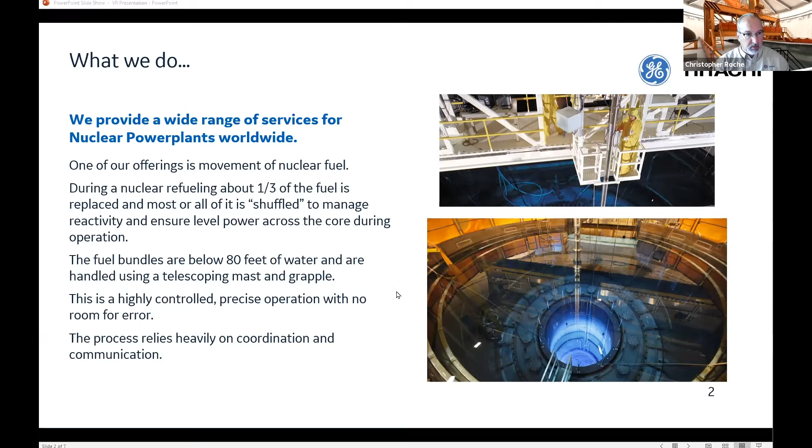So this is kind of what we're talking about as a company. When we do training, what we've done in the past is we build physical mock-ups, and we train our people on those physical mock-ups. So it's hands-on. In San Jose, California, we have a full-size boiling water reactor mock-up, and we can take students out there and we can train them to move fuel. We can put them on a mast and they can move their dummy bundles, but they're still fuel bundles, and we can go do that.

The problem with that is we have to fly everybody out there. We have one mock-up, and sometimes it's not used for moving fuel. Sometimes it's used for moving something else. So it's got limited availability. And you also have a limited, once again, I talked about we had customer people there. To get everybody together to coordinate that is very, very difficult. Those senior reactor operators are in high demand, and the sites do not like to let them go, especially for a week or something like that. They're very, very skilled people.

So we were looking at, hey, how can we improve our fuel moving capability, our fuel moving coordination? And this is for not just training new people, but also making sure that our experienced people are maintaining their proficiency. We started looking at what kind of simulators can we build, what kind of simulators can we put together. And we were coming back with a lot of, that's really not going to work for us. We weren't getting any good solutions. We weren't getting anything that was going to work.

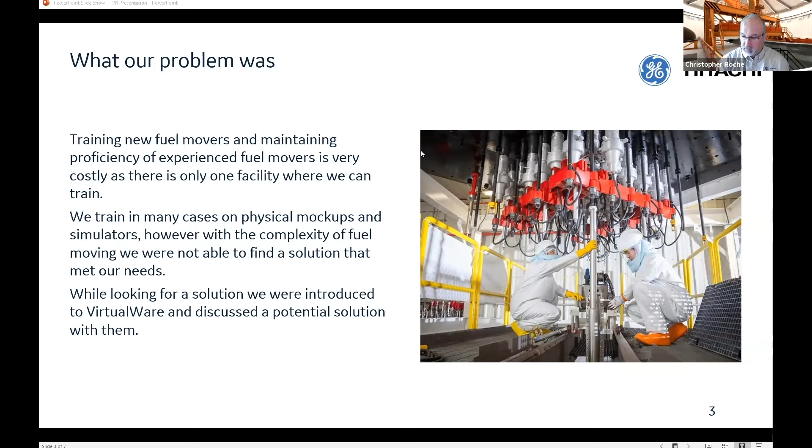We got introduced to Virtualware, and one of our executives in Europe found the company and was impressed, and said, "Hey, look, let's give them a try." So we signed a contract to do a proof of concept with them to make a virtual reality fuel moving simulator, and that's what we're going to talk about today.

So what we were able to do is actually incorporate physical controls that replicate what people do in the field. This is an actual mast in a nuclear power plant, and this is the driver here. And this is our virtual mast that replicates that, the same kind of grid around there. So the person's going to see that, they're going to feel that. It's going to feel the same way.

It's got haptic feedback. This is a telescoping mast, and it's a long telescoping mast. And when those sections hit each other, it rattles everything. This thing is great. I mean, it rattles things just like it does in the field. So it's very realistic in the way that goes.

We have a permanent virtual reality room installed in Wilmington, North Carolina, that's our headquarters. We also have a mobile room that's designed to be sent somewhere, set up, and we can put it almost anywhere that we can get power to it and everything else. And what's nice is we can set that up at a customer location. The SRO can go into that room. We can have people in Wilmington, North Carolina, and we can network these two rooms and have two groups that are in different physical locations working together, communicating and operating in the same virtual environment.

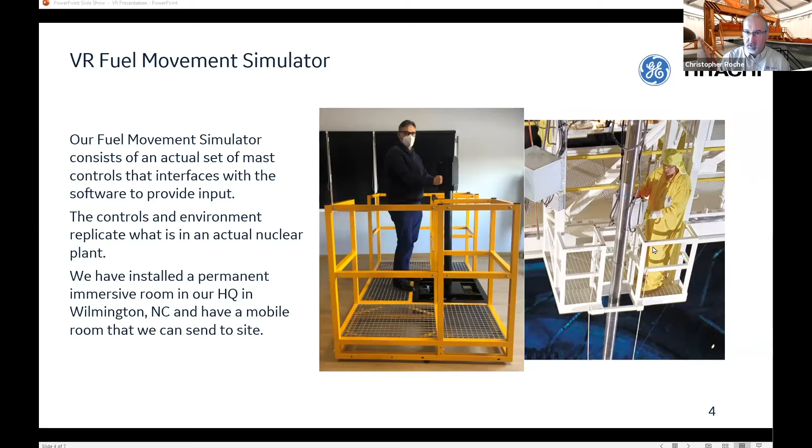So we don't have to travel SROs. We don't have to travel our fuel moving team to the site. We eliminate a lot of that cost, but we still have something that's very realistic, that's very immersive, and that really is focused on that communication, on the coordination, and reinforcing the process that we're trying to train.

So this video I'm going to show was taken, and this doesn't look like what I showed you last time. This is one of the prototypes, but it gives you an idea: user number one is the spotter, user number two is the person on the controls there. It gives you an idea of what they're doing in reality in the room, and then what they're seeing. It starts off, and I'm just going to play this and kind of talk through it and give you an idea of how we do this.

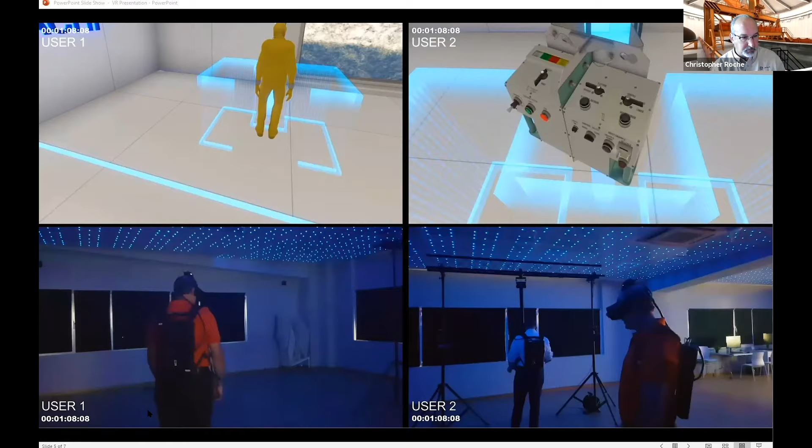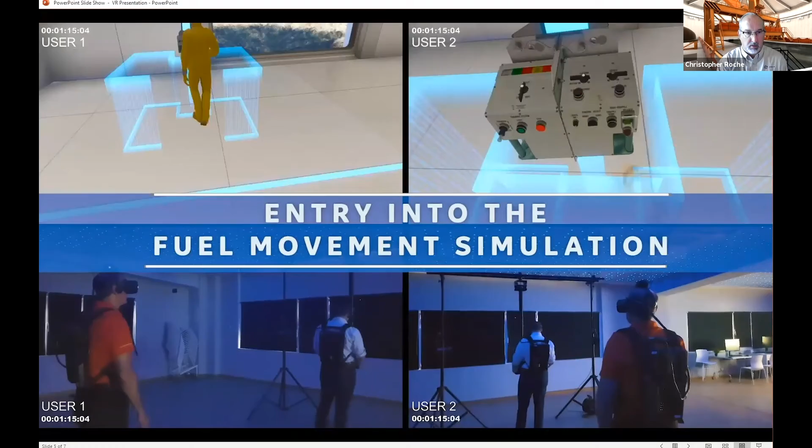So basically, this is setting up. Everyone's getting in place, getting ready to go into the simulation. You see the person holding their hand up - basically that's the fuel movement form, the form they use to say, hey, we're going to move this bundle to this location.

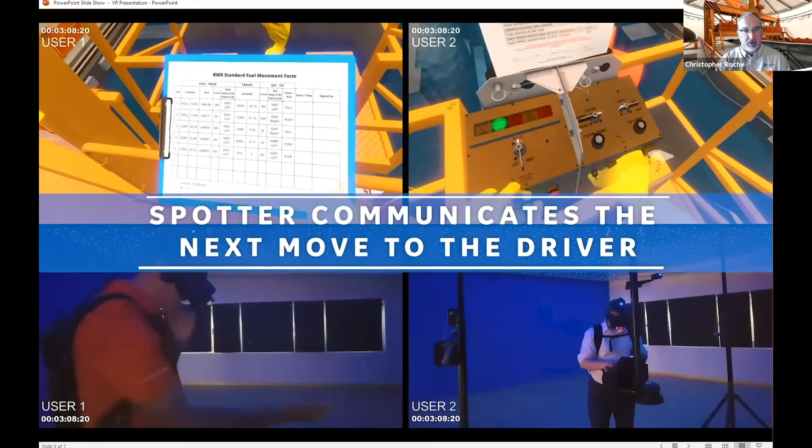Now they're in the simulation. So now if you see them when they look around, it looks like a nuclear power plant. It looks like an actual bridge. There's water, you can see ripples on the water. All of the indications that you'd have are present there. Camera views are present.

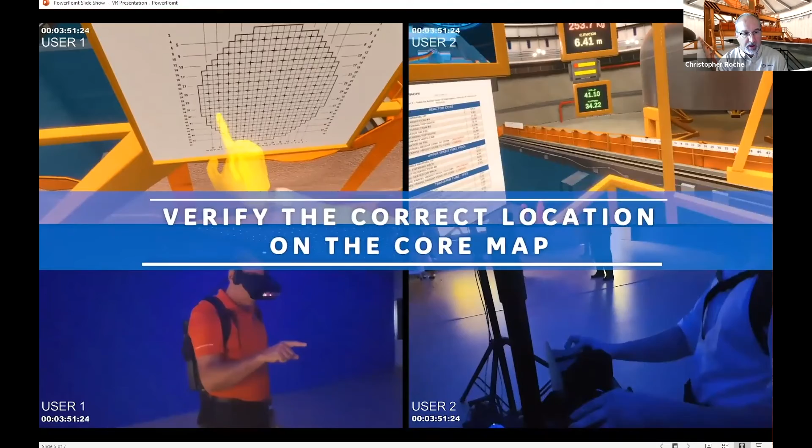What user one's doing right now is we call that circle slash - that's placekeeping, he's testing that. We have an IR sensor on the front of the goggles, so when they're looking at a core map, or when they're pointing at something, they can maintain focus like they would in real life, and they can count over spaces and do things like that.

So we're kind of jumping around a little bit, but they're actually lowering the fuel bundle now onto the grapple. And you can see this is a much more rudimentary mast setup, but it was very useful in proving the concept and developing the final one.

So you see in virtual reality, all the lights come on just like they would on the bridge. All of our interlocks are programmed into the logic. There's a lot of things we can do here.

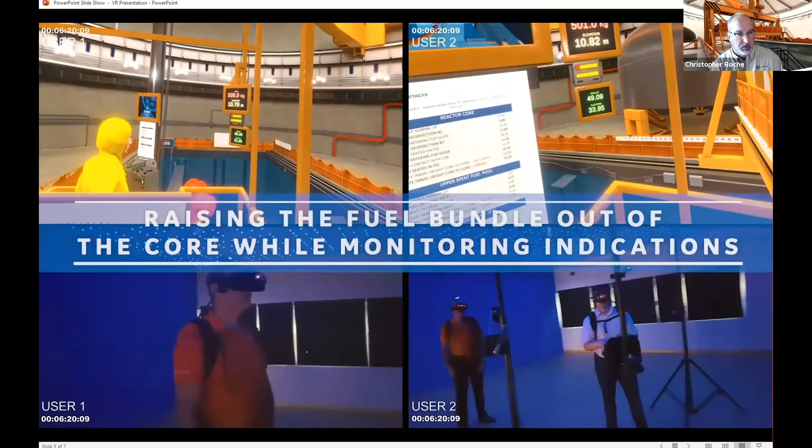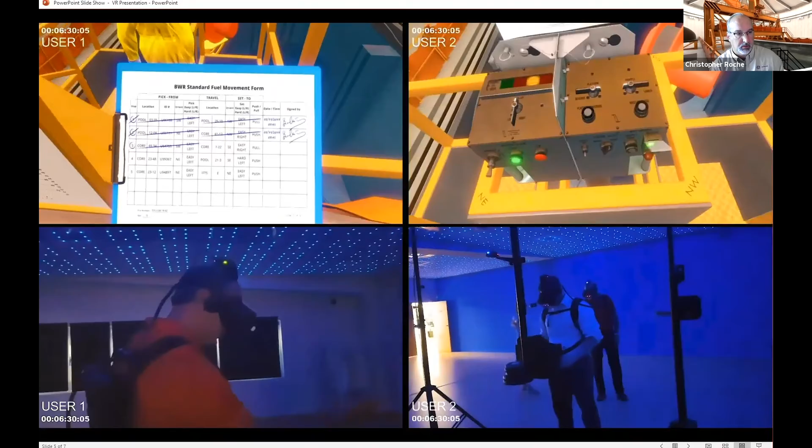But I mean, when you look at the environment, it looks just like what we work in. Maybe a little bit cleaner.

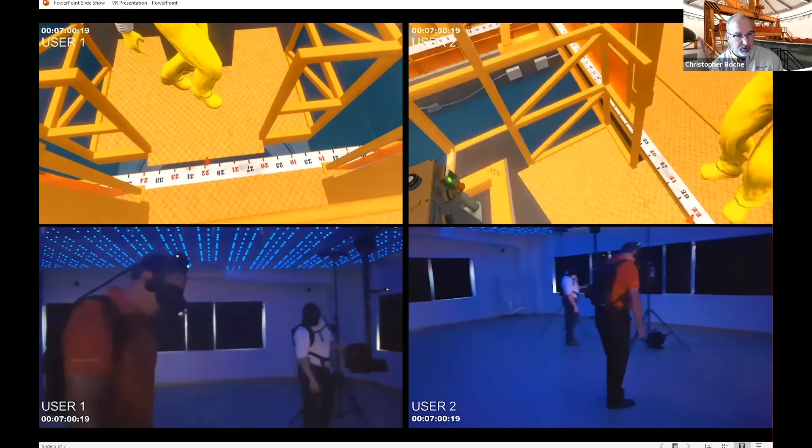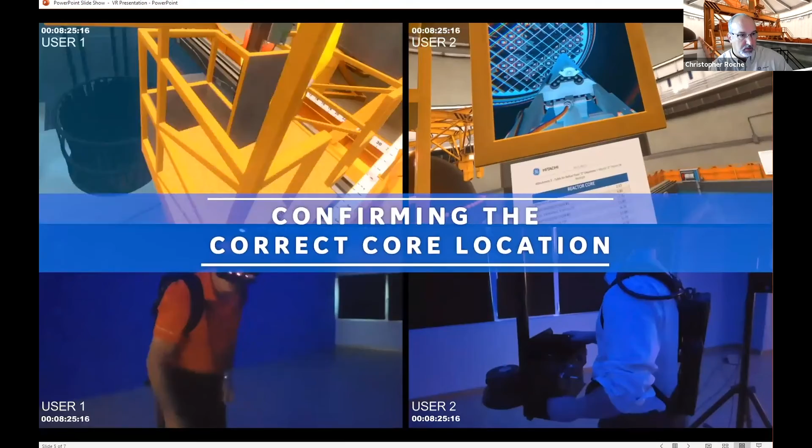So they've got a bundle on the grapple now, they're moving it to the next location. So you see, we have marks on the floor showing them where they are on the position in the core. Looking down, so he's counting over, making sure they are where they say they are, doing that verification. Then he's looking at the camera as well.

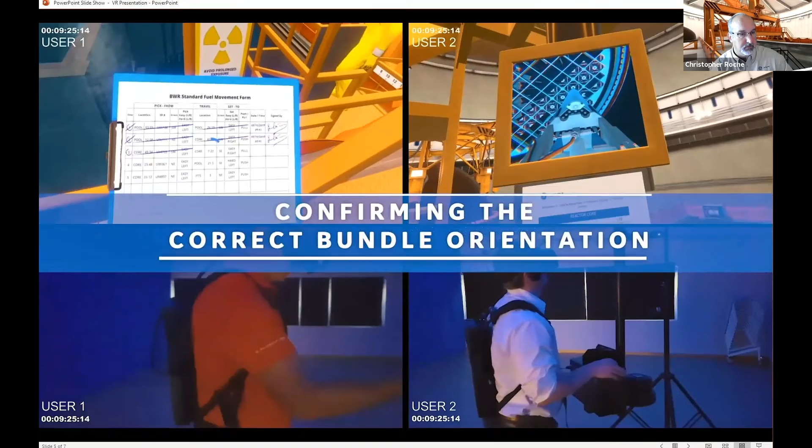And now they're inserting the bundle into the core. So this whole process, and what you can't hear now is their communication, but we've got a very, very formal process for doing this. It's a very large procedure. It's very scripted. The communications are very prescriptive.

Think of it like an aircraft checklist. When you're doing that, these are the things we have to do every time. Here are the concurrent and the independent verifications that we perform, so we don't put something in the wrong orientation. We don't put something in the wrong position, and we don't have any of these errors that are going to make our customers have to report to a regulator or something else.

So when we were looking at this, what are the real benefits of training in virtual reality? Well, one, we can train in a realistic environment. Sights, sounds, and feels of the power plant are well modeled and they're immersive. It's amazing watching people when they go into the virtual environment, because if you're on this bridge, you can walk through the guardrail and you can walk into the water, but people won't do it because it's that realistic.

It gives you that impression. No, I don't want to do it, and they have to make a physical effort to actually go do that. And it's kind of neat when you do. But when you think about it, sight, sounds, and feel are the critical things here. Smell and taste, we're not that worried about in a nuclear power plant.

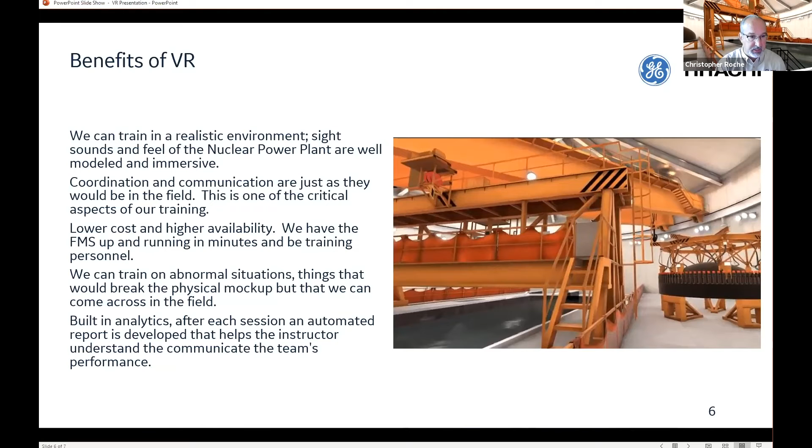So what's next? For us, our fuel movement simulator was kind of our killer app. That was what got us into virtual reality. We saw the value immediately, and we started developing this. We actually got the final mast design into Wilmington late last week. The team put it together in the room. Within an hour, we had it up and running, and we were moving fuel on it.

And it was absolutely impressive. Yesterday morning, we did our first customer demonstration with the fuel moving mast, and they were blown away with the simulation. We had seasoned fuel movers in there communicating, coordinating.

We had what was going on up on the screen, and we had a whole panel of customers, and they were just blown away by how well it worked, how immersive it was, and how it focused on exactly where we've had issues, and they can see the value there.

So the other thing they're looking for is fuel move rates. When we shut down a nuclear power plant, it costs a lot of money. When these teams start off, they typically aren't as efficient and fast as they are toward the end. So once again, another benefit of this is if we work with the teams and get them proficient, working together smoothly, coordinated, and then put them in there, we may be able to cut down some of the time for this refueling outage as well, while maintaining quality and actually improving quality, because a lot of the fuel movement errors we have are at the beginning when the teams are getting used to working with each other.